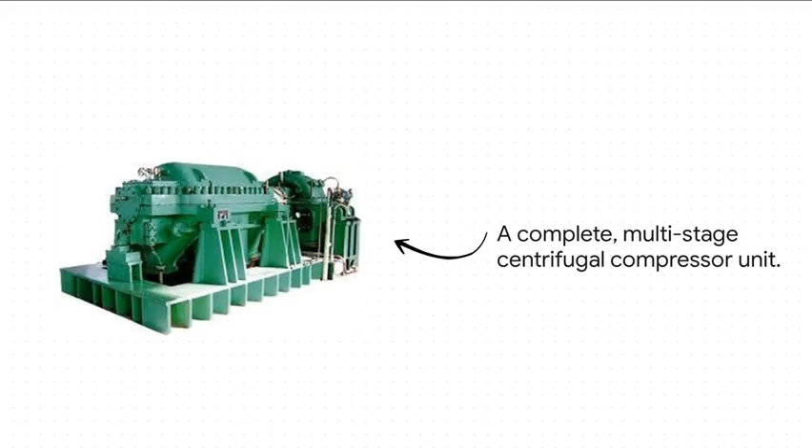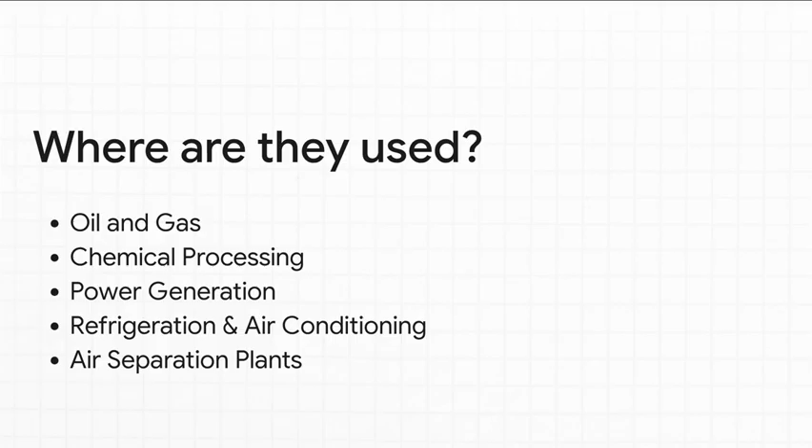And when I say essential, I am not kidding. We're talking about the things that make our modern lives work. The gasoline in your car, the electricity lighting up your home right now, even the plastics in your phone and the AC that keeps you cool on a hot day. Yeah, these compressors are the hidden engines behind all of it. They're everywhere, even if you never see them.

All right, so here's the game plan for today. First, we'll tackle how it all works. Then, we'll get into the guts of the machine, the rotating heart and the stationary skeleton. And to wrap it up, we're going to look at something really critical, how to troubleshoot compressor surge.

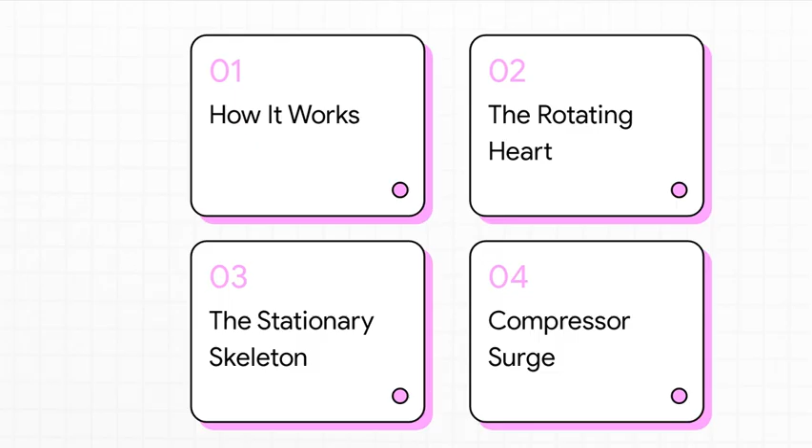Let's get into it. First up, how does this thing actually work? I mean, how do you turn simple speed into massive amounts of pressure? It turns out it all comes down to a really cool and surprisingly elegant principle of physics. So here's the core idea in a nutshell. The whole process is really just a brilliant act of energy conversion. You take kinetic energy, that's the energy of motion, right? And you give a ton of it to the gas particles. Then, the clever part is how the machine transforms all that speed back into good old-fashioned pressure.

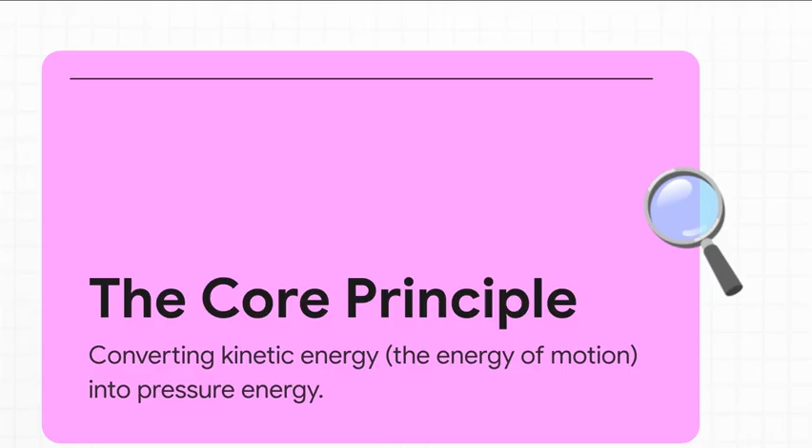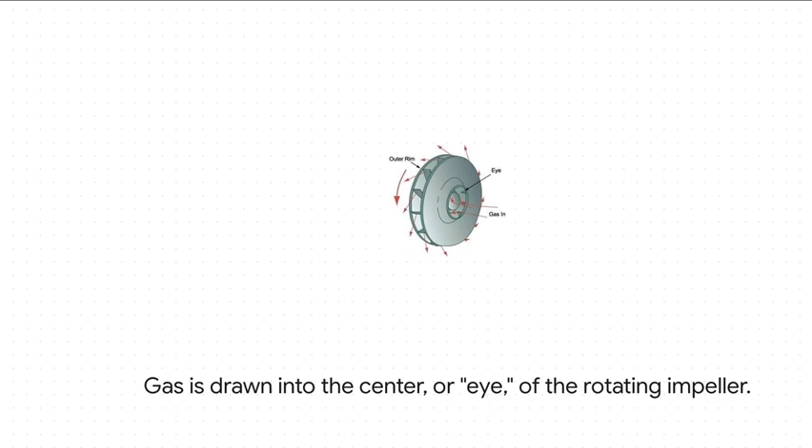Okay, so it all starts right here, at what's called the eye of this wild-looking, rapidly spinning wheel called an impeller. The gas gets sucked right into the center, and this is where the magic really begins. You see those curved blades? They act a lot like airplane wings, creating a pressure difference that basically pulls the gas in and then just starts slinging it outwards with incredible force.

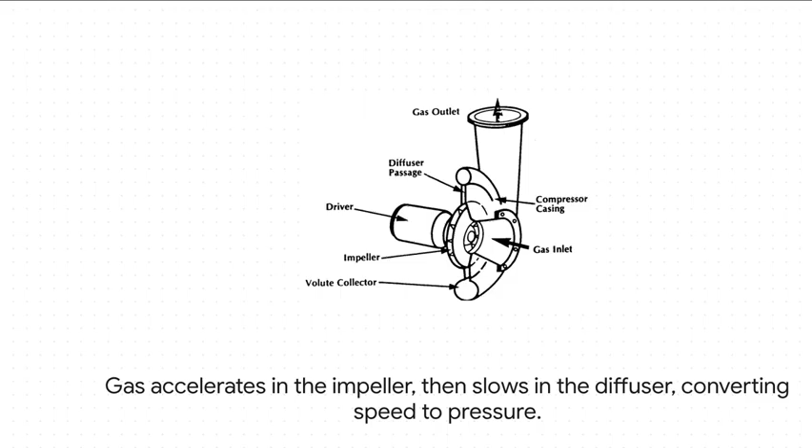So as that impeller is just whipping around, centrifugal force takes over and flings the gas particles to the outside at unbelievable speeds. Now, once the gas leaves the impeller, it's at its absolute fastest. From there, it flies into a stationary part called the diffuser. And if you look, you can see the diffuser is designed to get wider. That forces the super-fast gas to slow way down. And here's the payoff. As that speed, that velocity drops, all that kinetic energy has to go somewhere, and it gets converted directly into pressure. Boom! That's the principle in action.

Okay, so now that we know how it works, let's look at the actual parts that make it happen. We'll start at the very core of the machine with the rotor assembly. This is the collection of all the parts that spin together, the real rotating heart of the compressor. So, we've already met the star of the show, the impeller. That's what does all the heavy lifting of accelerating the gas. It's mounted on the main shaft, which is what transmits all the power from the driver, like a motor or a turbine. But check this out. There are two other components here that are absolutely critical for the machine's survival: the balance drum and the thrust bearings. Their whole job is to manage the insane forces being generated inside this thing.

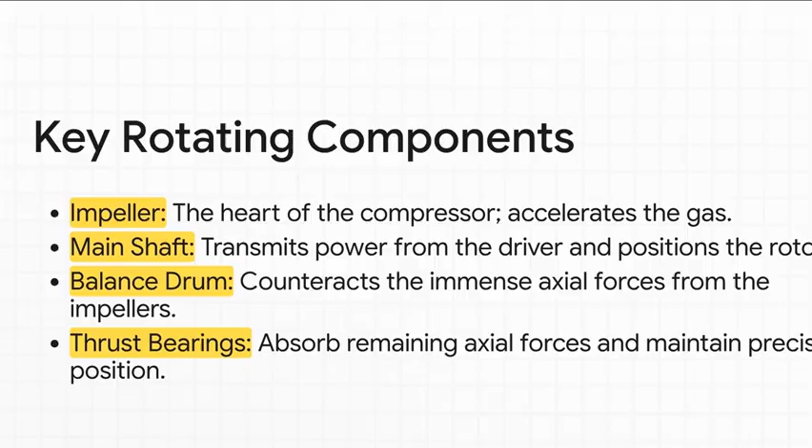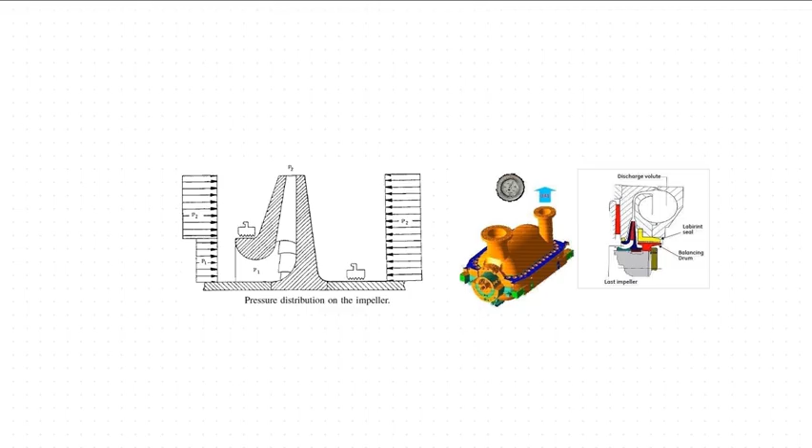And this right here shows you exactly why those last two parts are so important. Think about it. You've got this massive pressure difference from the front of the impeller to the back. That creates a gigantic force, we call it axial thrust, that is constantly trying to shove the entire spinning rotor sideways. So how do you fight that? Well, engineers came up with this brilliant solution called a balance drum. It actually uses the compressor's own high-pressure gas to create a perfectly opposing force, which cancels out most of that thrust. It's what keeps the machine's super delicate bearings from getting, well, completely obliterated.

All right, so that's the spinning stuff. But of course, the rotating assembly doesn't just float in midair. It's all housed inside a really complex set of stationary parts, the non-moving bits, that basically form the skeleton of the machine. And their job is all about expertly guiding the gas flow.

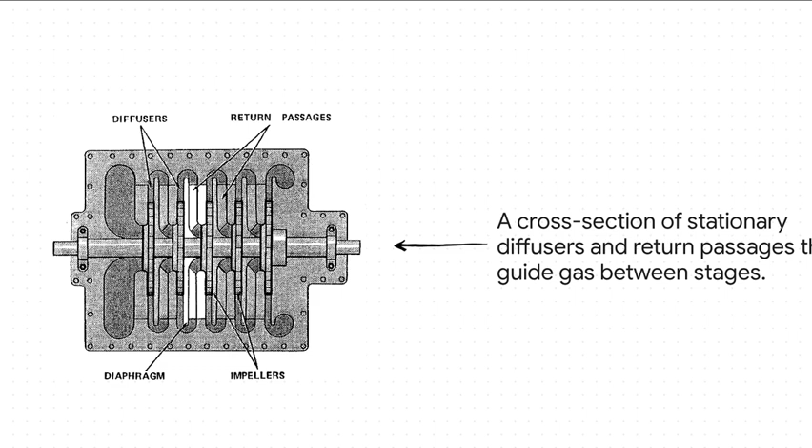Yeah, this cross-section shows it perfectly. You see, after the gas leaves one impeller and gets pressurized in the diffuser, it's often not done. For more pressure, it has to be guided smoothly to the eye of the next impeller for another round, another stage of compression. That's what these stationary return passages do. They're like these perfectly shaped aerodynamic channels that make sure the gas doesn't lose energy and gets to the next stage as efficiently as possible.

And even with these stationary parts, you've got some really key design choices to make. For example, that diffuser we talked about, it can be vaneless, just a simple open space. That design is super stable across a wide range of flows, but it's not the most efficient. Or you can put vanes in it, which act like little wings to recover pressure way more effectively. The catch? Those are only really efficient inside a very narrow operating window. It's that classic engineering trade-off, right? Do you design for broad, rugged stability or for absolute peak performance?

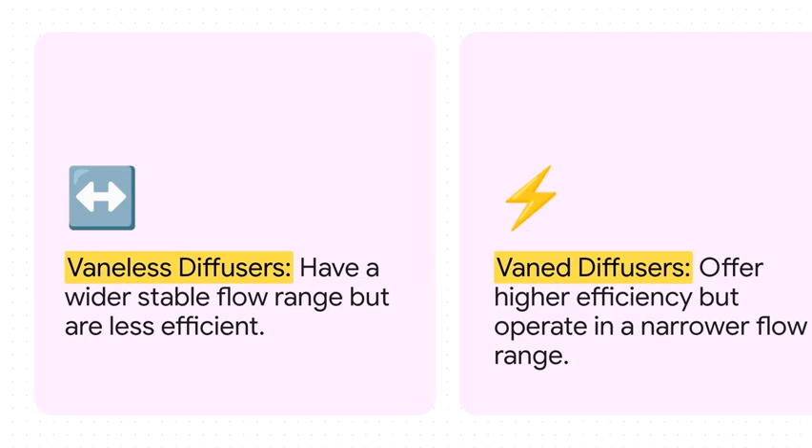So, what we've got here is this incredibly delicate dance, a balance of moving parts, stationary parts, all managing these immense forces. But what happens when that balance gets totally thrown off? Well, that brings us to the danger zone. We're going to talk about the single most dangerous condition a compressor can face: surge. See, this whole operation relies on one thing, a constant forward flow of gas. It has to keep moving.

So, what happens if something downstream, like a closed valve, blocks that flow? What happens when the compressor is still spinning like crazy, trying to build pressure, but the gas has nowhere to go? This is the crucial point. For any amount of pressure it's making, a compressor needs a certain minimum amount of gas flowing through it to stay stable. That limit, you can see it on this map, is called the surge line.

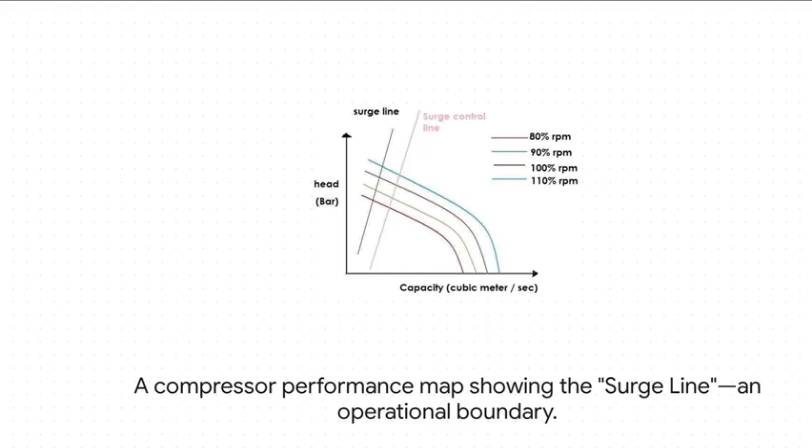If the flow drops below that line, well, the impeller just can't win. It can't push against the huge wall of pressure it's already built up, and the result is catastrophic. The high-pressure gas downstream suddenly reverses direction and just slams backwards through the entire machine. It's violent. And no, this is not a gentle process at all. Surge is basically a series of violent, rapid-fire explosions of gas reversing course.

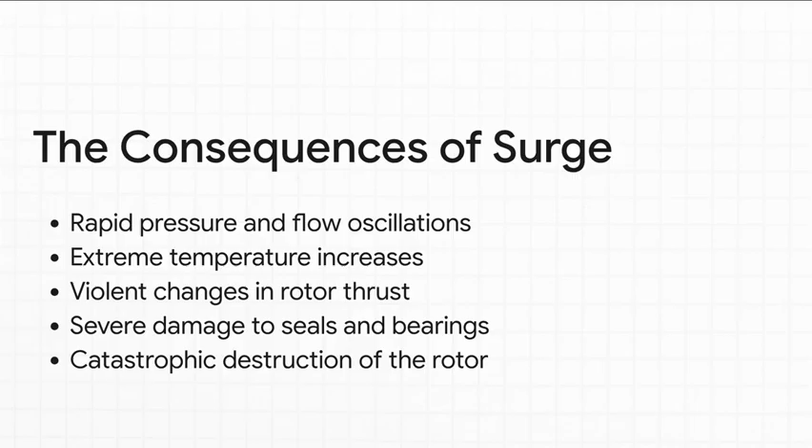The consequences are, well, they're severe. You get extreme temperature spikes from all that churning gas, massive vibrations that shake the whole unit, and that rotor gets slammed back and forth, destroying the thrust bearings. A single surge event can damage seals and bearings in just seconds, and if it's not stopped, it can lead to the catastrophic destruction of the entire rotor. It's that serious. So, obviously, you have to prevent this disaster.

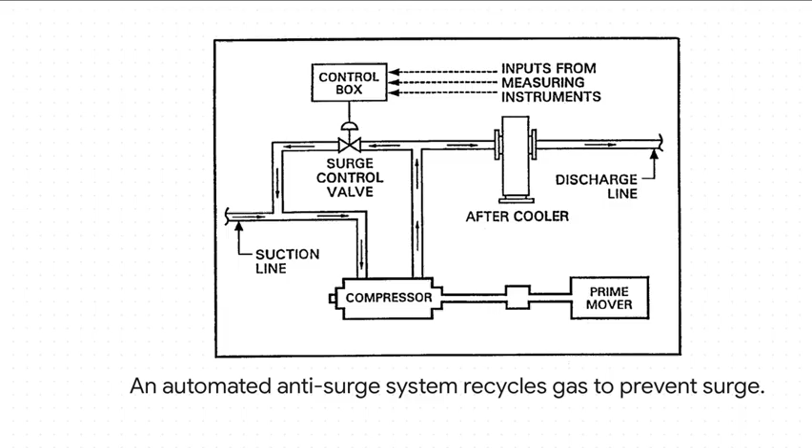That's why big compressors have what's called an anti-surge system. Think of it like a safety net. It's a control loop that is constantly watching where the machine is operating. And if it even thinks about getting too close to that dangerous surge line, a valve automatically pops open. What does it do? It recycles some of that high-pressure gas from the outlet right back to the inlet. This creates an artificial flow, basically tricking the compressor into thinking everything's fine, and that keeps it operating safely away from the danger zone.

So when you really look at it, a centrifugal compressor is just an absolute marvel of engineering, isn't it? It's a machine that's designed to tame just incredible speeds and pressures. But it's all built on this delicate balance of immense forces. And as we've seen today, understanding how all those parts, the rotating and the stationary, all work together, well, it's not just some academic exercise. It's the absolute key to harnessing all of that incredible power safely and reliably, day in and day out.